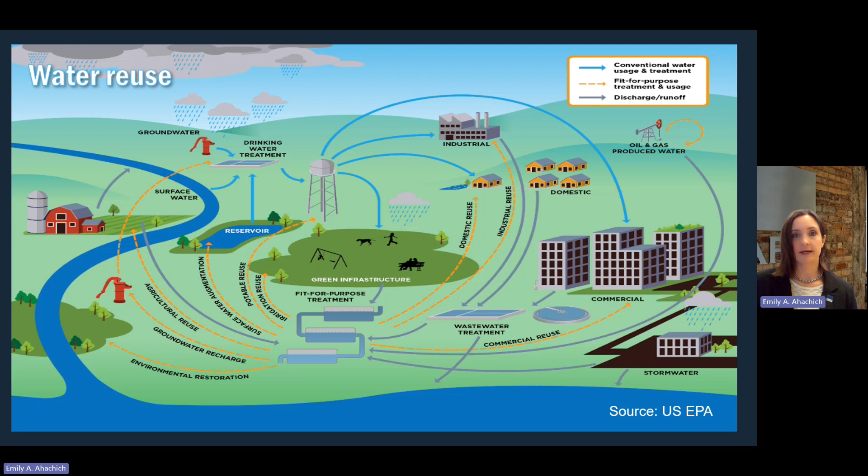So how do you get started? First, it may seem really obvious, but it is so important to clarify internally what is driving you to address water reuse for your organization. It might be a corporate or site-level sustainability goal, rising stakeholder expectations, or emerging regulations. And different parts of your organization may have different ideas about what water reuse is and what defines success. So it is good to make sure everyone is on the same page as early as possible.

Second, even if your primary driver is a voluntary goal, it's important to consider both existing and emerging regulations. These include rules related to human health and safety, water sources, consumption, and discharge. Sharon will talk about these in more detail in a few minutes.

Third, establishing a baseline is foundational to setting realistic goals and demonstrating meaningful progress to your stakeholders. This involves quantifying what is coming into and going out of your facility and is called a water balance. It also includes evaluation of the various quality needs of water users throughout your facility, as well as any potential changes that could impact your future water needs, such as plans for production expansion.

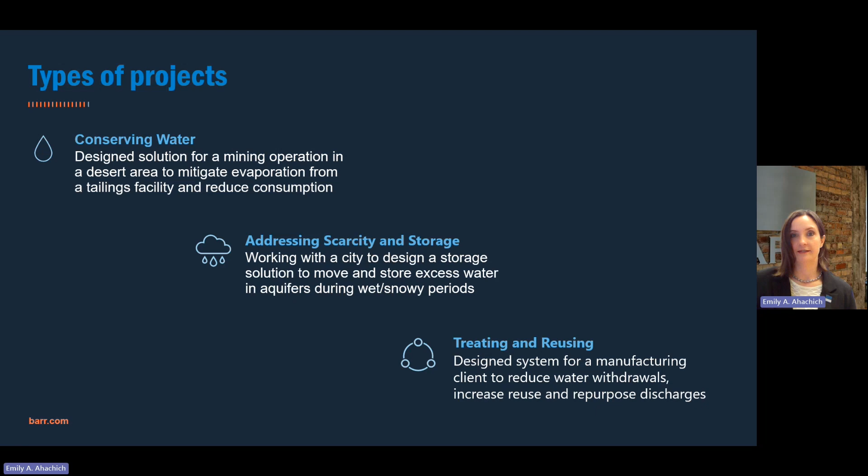This particular project was done with one of our global manufacturing clients. They had established a sustainability goal to reduce water use by 25% across their overall geographic footprint. They also set a long-term goal to achieve zero liquid discharge at one of their facilities in the Midwest. We were engaged to evaluate their current state, recommend improvements, and ultimately design a treatment solution for their Midwest facility.

Our first step was that foundational one, to develop a water balance. This involved quantifying the flows coming into and going out of the facility, as well as understanding quality needs throughout the site. We then assessed the capacity of the site's existing equipment, including storage tanks, pumps, and pipes. Next, we developed a model to compare the quality and volume needs of the various water users throughout the facility to the capacity of the existing equipment.

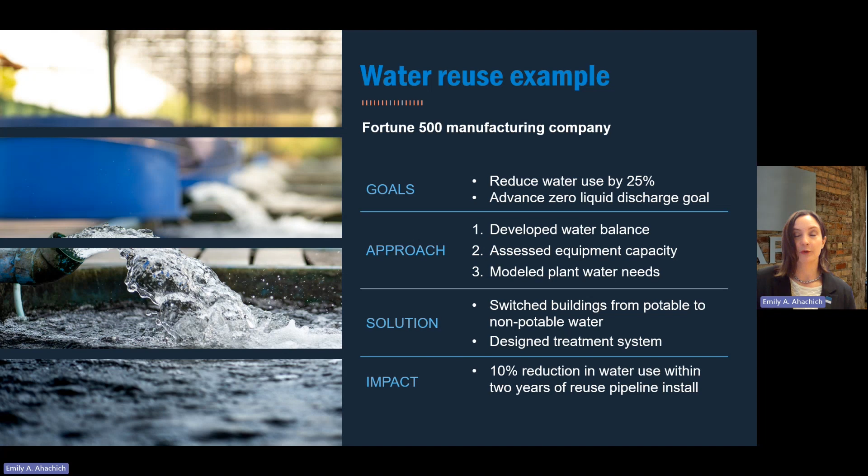Thank you, Emily. Hello, my name is Sharon Dahl, and I'm going to provide you with some basic information regarding regulatory considerations of water reuse. As a reminder, this webinar is not intended to provide all-inclusive and all-necessary information for water reuse projects. If after this presentation you have questions, please reach out to your Barr representative for further information. In the next few slides, we'll be walking through water reuse examples, as well as discussing regulatory considerations.

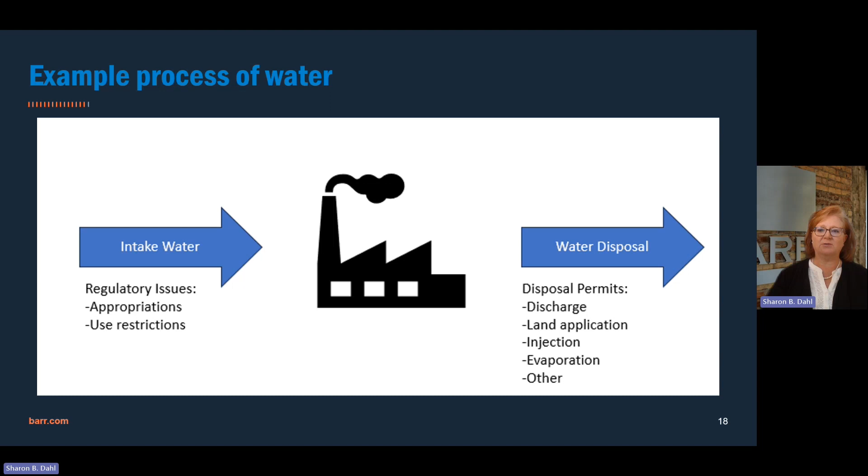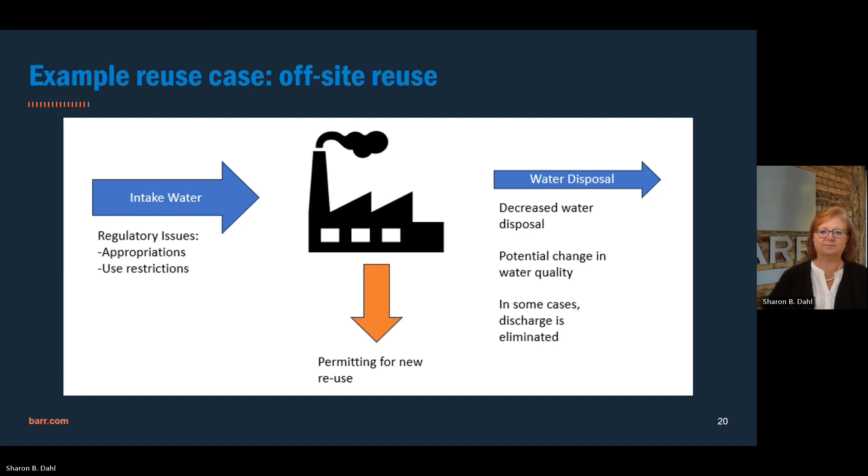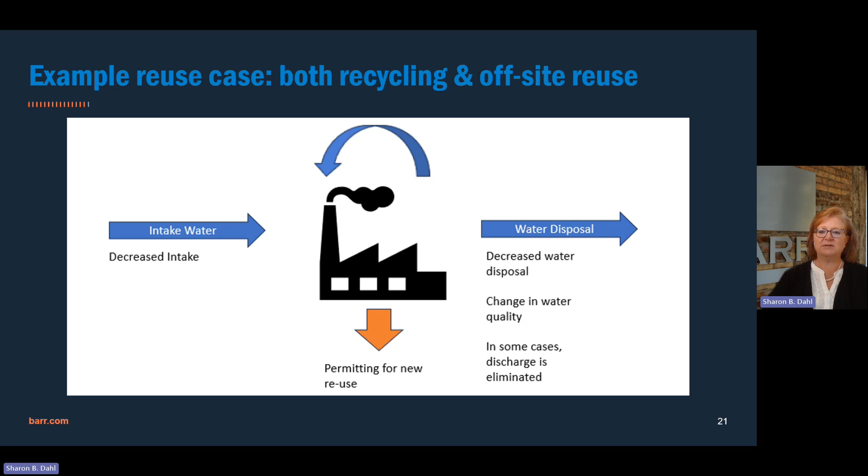For the third case, the water that the facility is using is being reused outside of the process. While you still have water appropriation limits and use restrictions on the front end, you may see a net decrease in water disposal, potential changes in the water quality being discharged, and in some cases, you may eliminate the discharge altogether. In the last example, we take a look at both water recycling as well as reusing water offsite. By employing both of these techniques, we reduce the amount of water that is needed, along with modifying the quality and quantity of discharge water. This will decrease water disposal and once again may eliminate the need for discharge altogether.

In considering if water reuse is right for you, there are several categories of regulatory requirements to consider. These regulatory requirements vary by location and may come from a mixture of federal, state, and local regulations. First, it is important to understand which sources of water are allowable to be reused in your jurisdiction. One question to ask yourself is, are there regulatory restrictions on the sources and amount of water that may be reused?

Additionally, it is important to understand how the water is allowed to be reused. These requirements may come from a mixture of federal, state, and local regulatory agencies focused on protection of public health, agriculture, and the environment. Some questions to consider: are there restrictions on what water may be reused at the facility? Are there water conservation requirements to be considered? Are there water quality requirements that apply to what the water is being reused for?

In our opinion, offsite water reuse is the most complex regulatory component for water reuse. Any external or offsite reuse of water will require approvals. These may come from irrigation permits, Department of Health, agricultural regulations, local ordinances, or others.

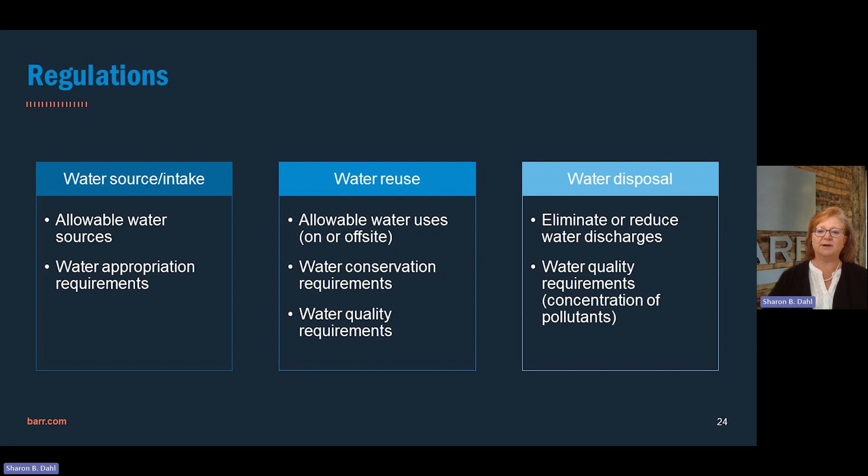Keep in mind that this information is a high-level overview of the types of regulations that may apply, and that you should verify the requirements of your specific federal, state, and local regulatory agencies as they pertain to your water reuse projects.

Shifting to federal requirements, EPA is becoming more and more sensitive to the needs of the communities and industries to implement water reuse projects. In order to assist businesses in understanding the regulatory requirements, EPA has a website that helps facilities understand their state requirements as it pertains to their water reuse. This is an excellent website to get regulations both at a federal level and at a state level.

EPA is working with permitting authorities to better understand the broad range of permitting approaches, to explain how the permits can accommodate and/or incentivize water reuse, and to encourage both permitting authorities and permittees to work cooperatively when permitting water reuse projects.

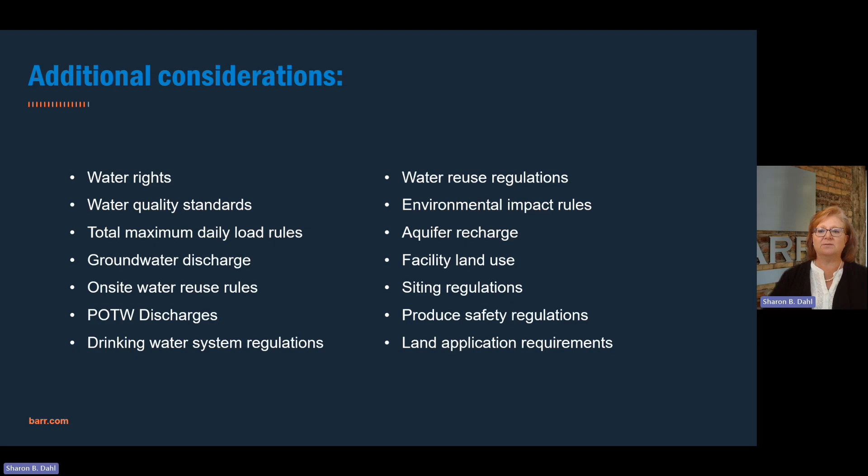And finally, you need to be aware of the many state agencies that could be involved in the way that you are planning to reuse your water. In the state of Minnesota, for example, the Department of Natural Resources assists in water supply planning and conservation assistance. The Department of Agriculture provides technical support to crop producers, food producers, and food marketers in safety of water supplies. The Department of Labor and Industry reviews variance applications for non-standard practices such as gray water and stormwater by the Plumbing Board.

The Department of Health provides oversight on source water assessments and evaluation of common rainwater and stormwater reuse installations. The Minnesota Pollution Control Agency provides oversight for the municipal wastewater reuse, and the Minnesota Board of Water and Soil Resources ensures that the state's soil and water conservation policy is being adhered to, along with the oversight for the Wetland Conservation Act. So as you can see, there may be several agencies that are required to be involved at a state level for water reuse projects.

And as for upcoming regulatory changes, several states are in the process of revising their water reuse rules on potable water reuse, as well as implementing water quality standards on potable water reuse. We are currently seeing this more in the states to the west, such as Arizona, California, Colorado, and Washington, but anticipate additional potable water reuse initiatives soon in other states as well. And again, it is always recommended to verify the regulations for use in your particular state.

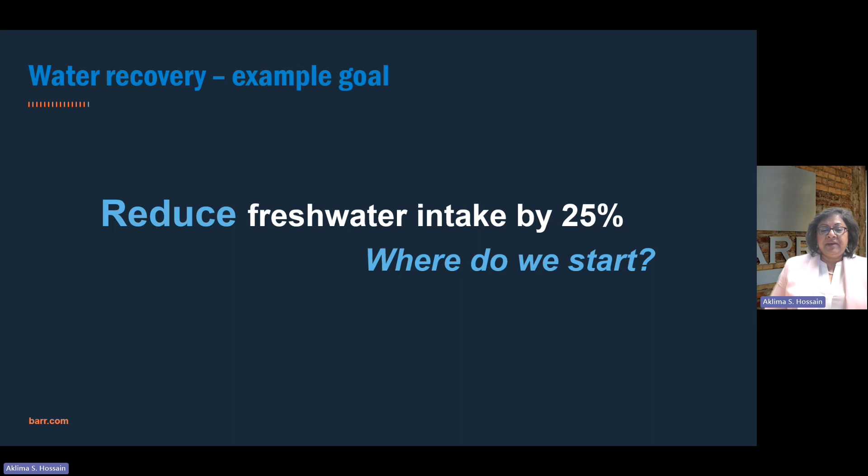So here's a scenario. Your corporation is looking at reducing freshwater intake by 25%. It could be a voluntary good water stewardship goal, or let's say you're in Arizona and the recent droughts have you nervous. Would there be future regulations that might restrict freshwater supply to your facility? So where do you start? In today's presentation, I'm just going to give some basic general guidelines and share some project stories, and hoping that the takeaway would be ideas that will help you with planning.

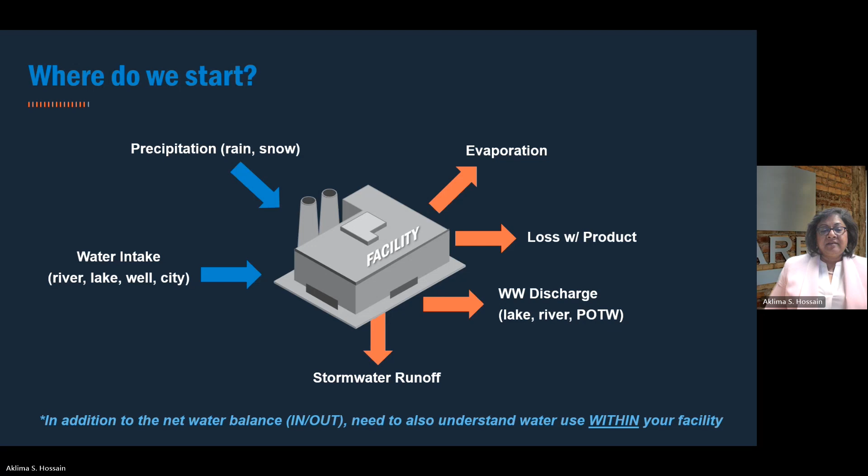So where do we start? We look at a facility's water mass balance. That is basically all the waters that are coming in, all the waters that are going out, and the processes within. For example, stormwater runoff. It might be going to a pond, but now you could look at potentially capturing that, do some treatment, and using it within the facility. So when you start with the exercise of knowing all your water ins and outs and what's happening within the facility,

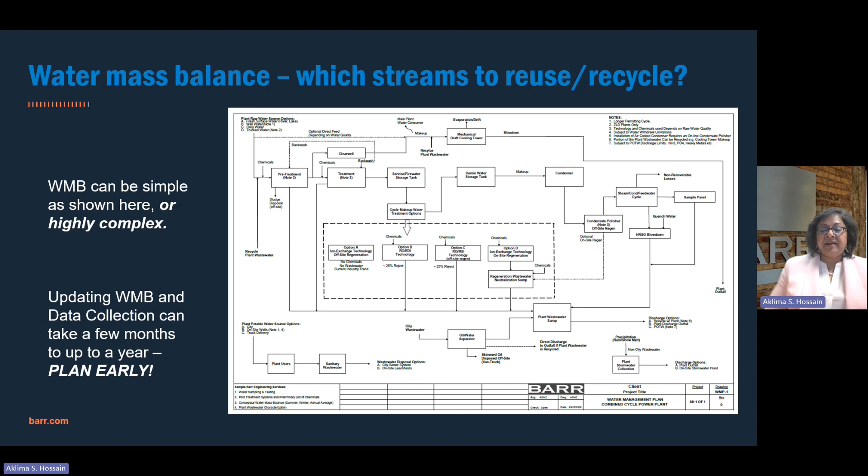it could be a simple water mass balance, depending on your specific facility and the complexity of operation within. Typically, when a facility is fairly new, chances are the water mass balance is truly representative of the flows, all the flow paths, flow rates, and quality. If not, it's been Barr's experience that updating an old facility water mass balance could take from a few months to even up to 1 year. The whole point here is plan early so you can correctly identify what are potential streams that could be targeted for treatment and reuse.

As you are doing the water mass balance updates, ask yourself if it is reflecting the current conditions. And that might mean walking down the facility with drawings. Find out if there are data gaps. Maybe there are some streams that you don't have flow rates and quality. So install flow meters, sample those streams. And when you're collecting and analyzing water samples, make sure that it is truly representative of the min, max, average values, because that impacts the water treatment equipment and how it's sized.

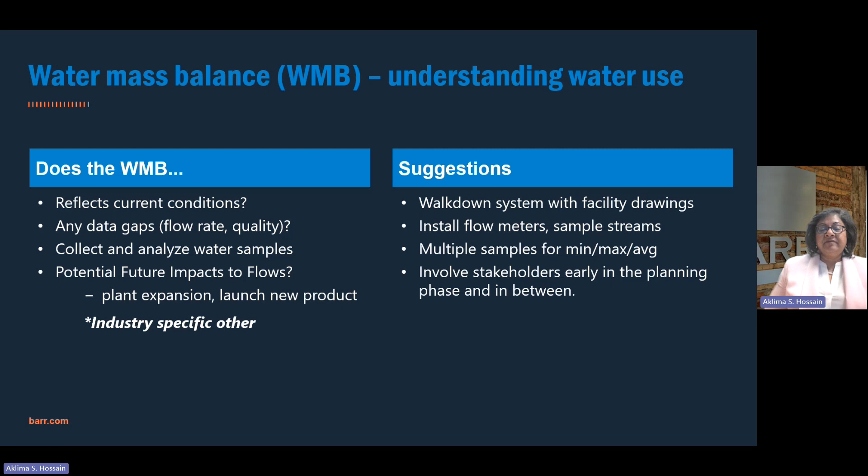Also, future potential impacts to flows. Maybe there are plans for expansion of your facility that the team evaluating the options for water recycle is not aware of. So involve all the stakeholders early in the planning phase and in between, so you are totally aware of all the water flows, current, future, and how everything is related to each other.

Updating the water mass balance can also be an auditing experience. Maybe you identify low-cost freshwater use reduction solutions, like, for example, fixing leaks, using high-efficiency toilets, capturing rainwater from rooftops. Or maybe you could end up identifying procedural changes that could save water. For example, vacuum solid waste spills instead of washdowns. Or if you don't have a stormwater pond in your facility, maybe install one where all the rainwater could be collected and reused.

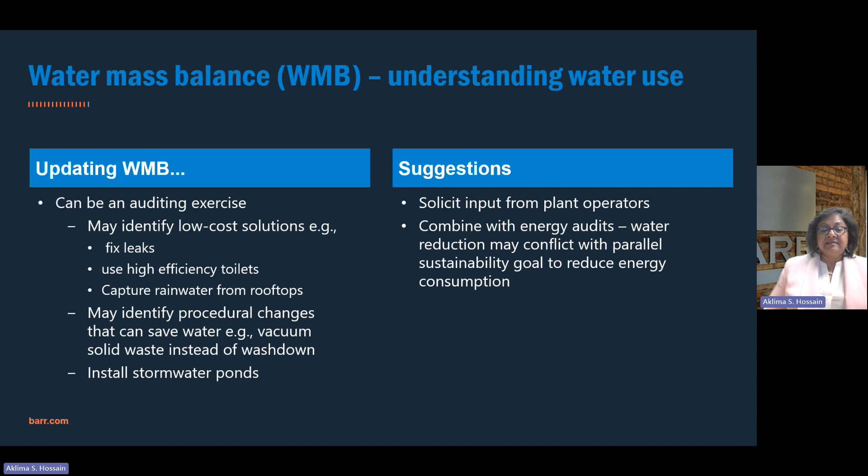And as you are doing this water mass balance update and investigating your facilities, solicit input from plant operators. They are very, very valuable. And from personal experience, I can tell you they know stuff and could even have good ideas. And then combine the water mass balance with maybe energy audits, just in case your facility has a sustainability goal of energy reduction. Well, water reduction, all the treatment equipment, that's going to use energy. So it might conflict with your parallel sustainability goals. So keep that in mind.

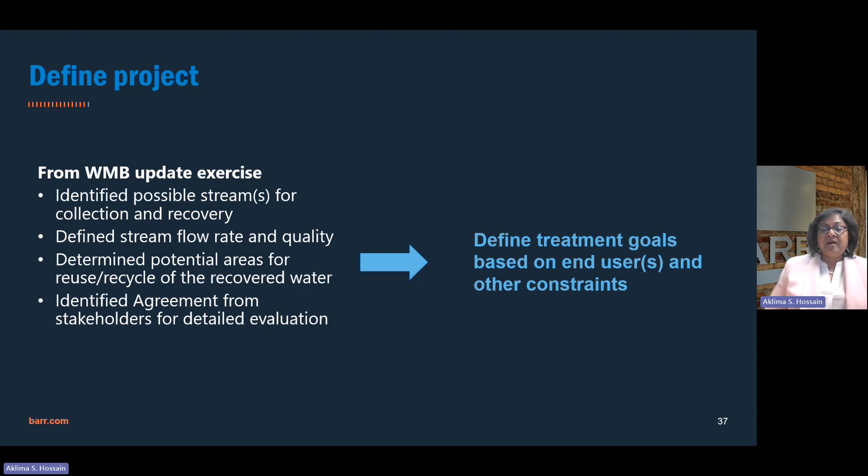So from your water mass balance update exercise, you have possibly identified a couple of streams to be considered for recycle, reuse, defined their flow rates and know their quality. And then the next thing is, if I treated the water, where could I use it? So knowing the quality limits for those potential uses, and then again, agreement from your stakeholders on what you're planning to do. So all this basically goes into, I would call it, a project charter.

And that's basically step one here, where you've identified possible users, you know what those quality limits are, and based on the quality limits, the next step is preparing a matrix of possible treatment solutions to meet those quality limits. And then conducting feasibility studies. At this point, maybe engage your engineering department or hire an outside consultant, but conduct high-level feasibility studies just to see which treatment option might be viable.

And then at this point, it might just be number of dollar signs, right? To basically make a matrix of XYZ technologies and their corresponding capital cost. And don't forget operating costs too, because if you look at, for example, a 30-year life cycle between one treatment option and another, say one treatment uses a higher amount of chemicals, the net present value of that might end up being more than a low-cost solution. So you need to take a holistic approach.

And then narrow down from your number of dollar signs and feasibility, technical pros and cons to the most promising. And at that point, you need to delve into it a little bit more, do a more narrow cost estimate, say, for example, a class 4, minus 30 plus 50, and basically evaluate what the treatment technology might be.

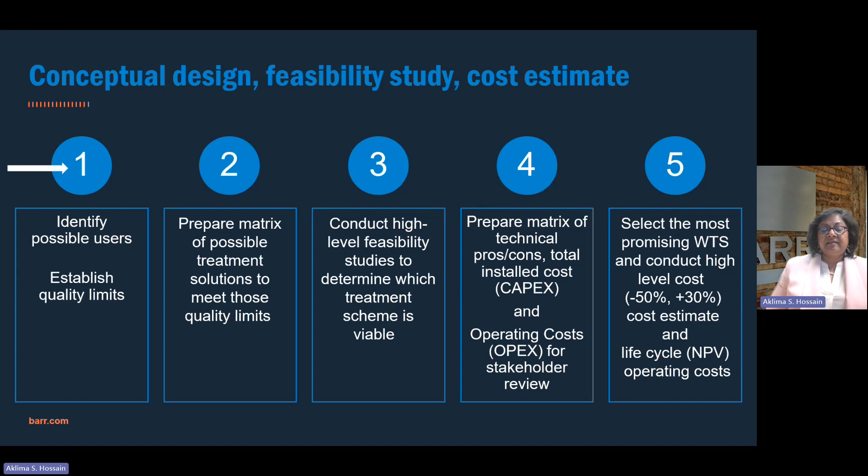So in treatment considerations, again, make sure you understand if there might be some future water quality changes. I'll give you a project example. There was one project where they installed a treatment system, and after 2 years, the feed water or raw water quality changed drastically because the plant changed where their raw water, the fresh water, was coming from. And so the treatment system installed was undersized, could not handle the extra species that was in the different water source.

And then plan sufficient time for doing maybe bench testing and if needed pilot tests, because there's a lot of new innovative technologies now. Your specific facility, where it's located, basically has unique water quality. So it's best to do some pilot testing before you spend millions of dollars installing a full scale facility. So the point here is plan ahead.

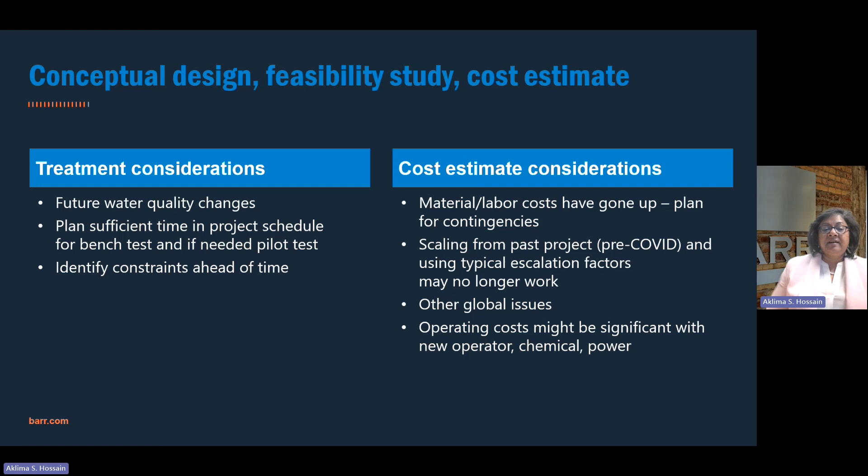Some cost estimate considerations. This is like lessons learned. There was a project for which I did a feasibility study, did a cost estimate. That was pre-COVID days. And then after COVID, that cost increased so much that now when I do a cost estimate, I do not scale from past projects, because it no longer works. And then there's all these global issues going on right now. Labor costs have gone up. So a word of caution, not to scale from past projects, but try to get current prices on materials and labor as you do your cost estimates.

So again, like I was saying, after you've done your evaluations and cost estimating, high level looked at some treatment technologies, you may need to go back to the drawing board to say, okay, my 25% freshwater reduction goal is not viable. So maybe I need to cut it down to 20%, or maybe you made discoveries where you can reduce it down to 50%, and that would be really great.

Here's my definition of reuse and recycle. Reuse is like collection of rainwater from building roofs, very little treatment. You're basically repurposing the water. And recycle involves some level of treatment before you can use it.

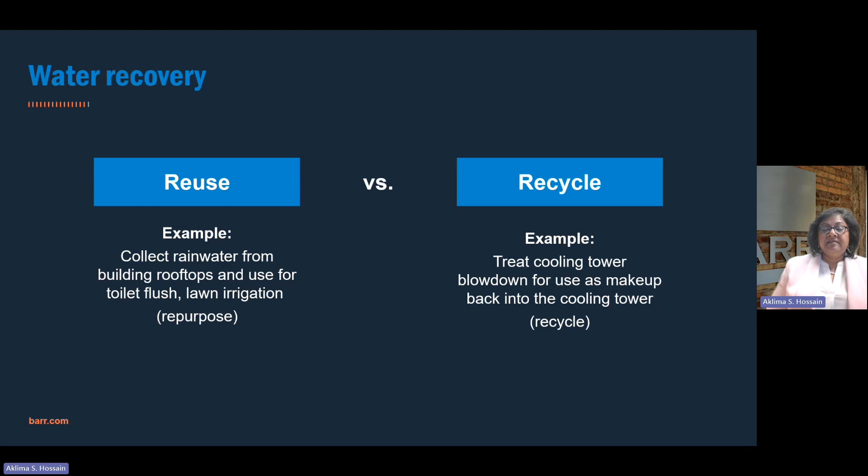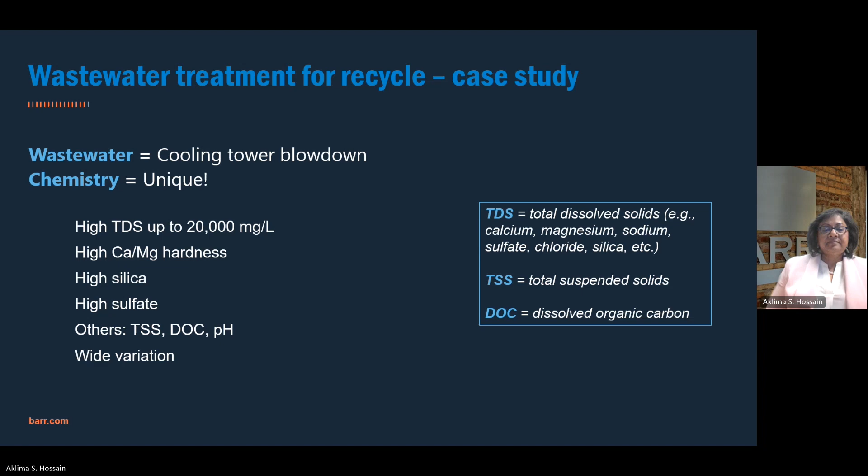So here's a case study. This is water from cooling tower blowdown. The chemistry, as you see, is very unique. Very high TDS. Silica, sulfate. So for this particular plant, option 3 would have been best, where you're recovering all the water, but zero liquid discharge involves your primary treatment, secondary treatment, tertiary treatment, and it's very expensive.

Option 1 would be some treatment, but then you have a large reject stream. And this particular site had on-site evaporation ponds that could only handle 50 GPM of water. So we basically settled on option 2, which is higher recovery of water, about 90%, that would get down to the evap pond water storage limitations.

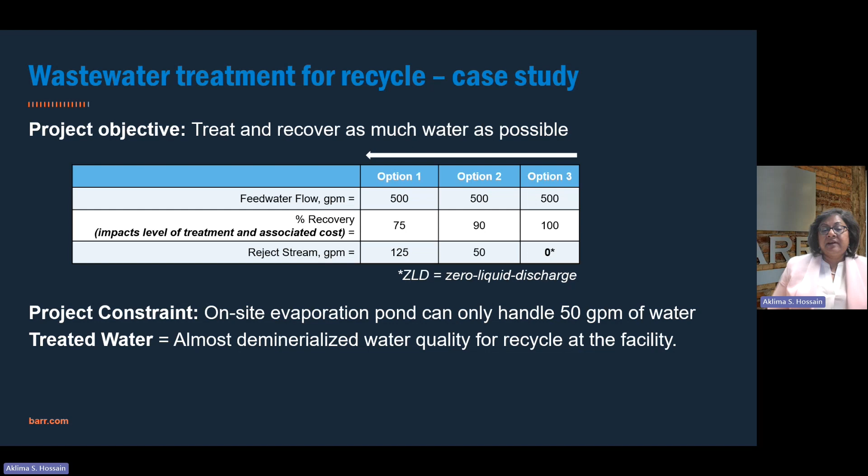And how do we do that? So here we had to look at different RO technologies, like up to 4th stage RO treatment. And that might get you to the 90% recovery, but as you're concentrating the water as you go from one stage to the other, the membranes are exposed to high TDS water, right?

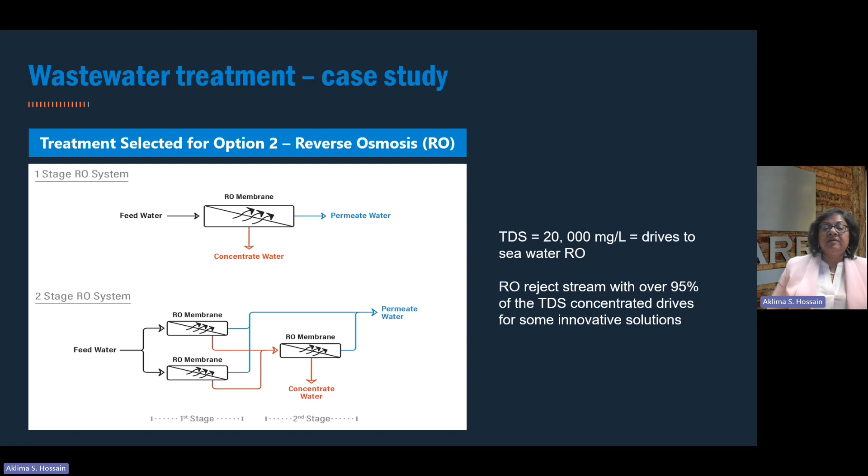So it's a balance of chemicals, for example antiscalants and so on, or use of different innovative new membranes in the marketplace, right? But will this work or not? Unless you do a pilot test, you can't be sure that it's going to work consistently year in, year out, because as the RO membranes foul, maybe you don't get the same recoveries in year 3 as you would 6 months after it started.

And speaking of RO membranes, this particular project, there were so many different types of ROs, so many things to consider. Again, bottom line is there are some innovative technologies out there, new types of membranes, promises. But again, I'm the type of person that unless I do a pilot test and it proves out, I would be hesitant to spend millions of dollars. So again, the point here is, depending on your facility, plan early. You might need to do some pilot testing.

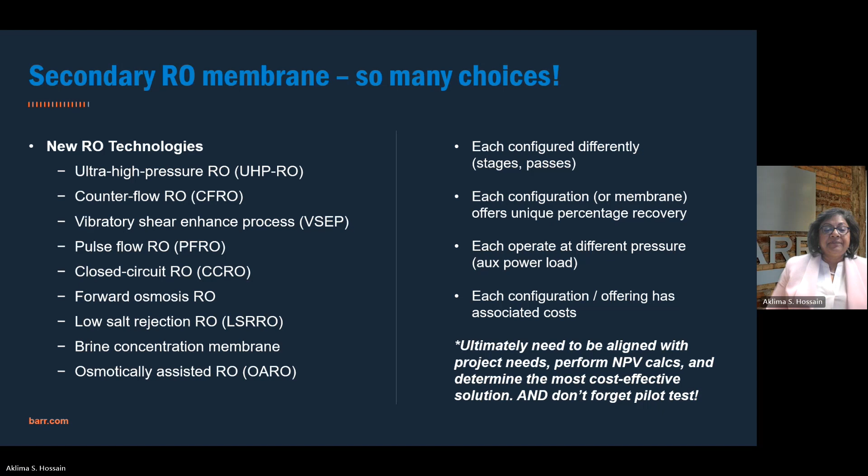So now I'll hand it over to Bailey to summarize all the takeaways from this presentation. Thank you.

Thank you, Aklima. So today we've talked about our key drivers and how to plan for regulations, which, as Sharon stated, will vary state to state. We've also discussed how to evaluate your facility and create your own water balance based on quality of data and quantity of data. We've also talked about how to select appropriate technologies to treat that water for recycle and reuse.

A few key takeaways that we would suggest. One is plan early. This will ensure that you have ample time to understand your facility and build that water balance. It gives you enough time to involve key stakeholders and make sure everyone is aligned to your key goals, and that everyone has the appropriate buy-in for your process. Be sure to keep in mind how any changes you make to your water balance or to your production and your process impact your facility and your future needs.